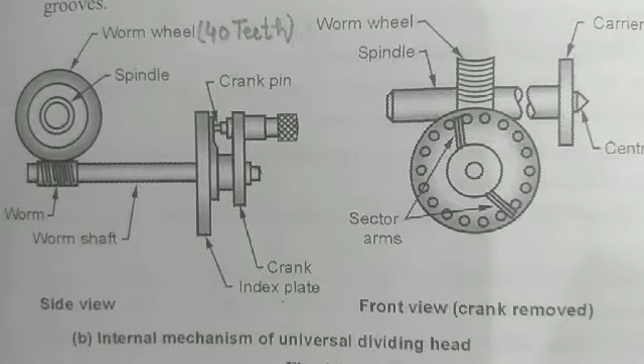Now since we have to make 13 gear teeth on the periphery of the workpiece, which is 50 millimeter in diameter and 150 mm in length, to make 13 gear teeth on its periphery, we have to rotate this workpiece in such a way that 13 equal parts are made.

And for dividing the periphery of the workpiece into 13 equal number of parts, we need a mechanism which is called a universal dividing head.

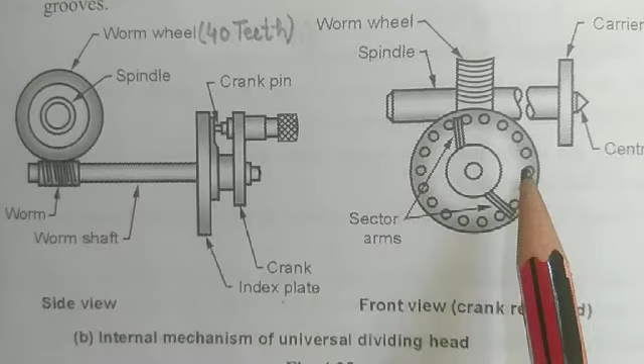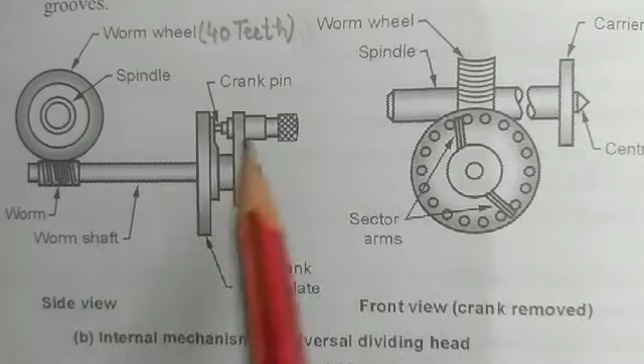Threaded worm. The threaded worm is connected to the worm shaft, and from the worm shaft the index crank is connected. At the top end of the index crank there is a crank pin, and here you can see there is an indexing plate.

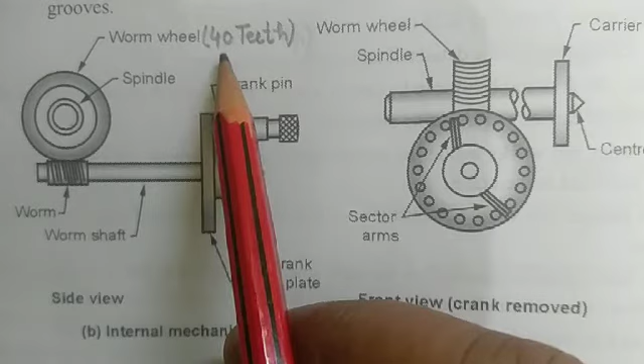Now this worm is connected to a worm wheel, and this worm wheel has 40 teeth on its periphery. This worm wheel is mounted on a spindle.

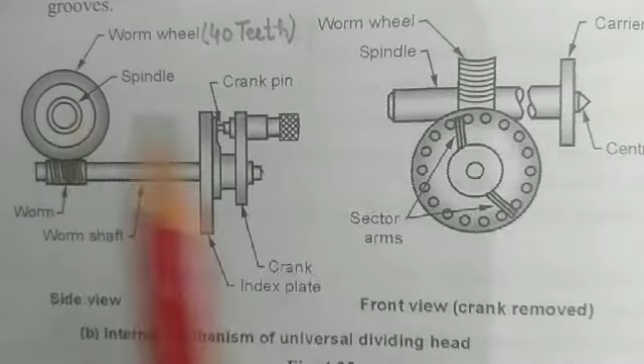Now in the front view we can see here this is the worm wheel having 40 teeth on its periphery, and here is the spindle. This worm wheel is mounted over the spindle, and on the other end of the spindle there is a carrier on which the workpiece, on which the number of teeth are to be cut, is mounted.

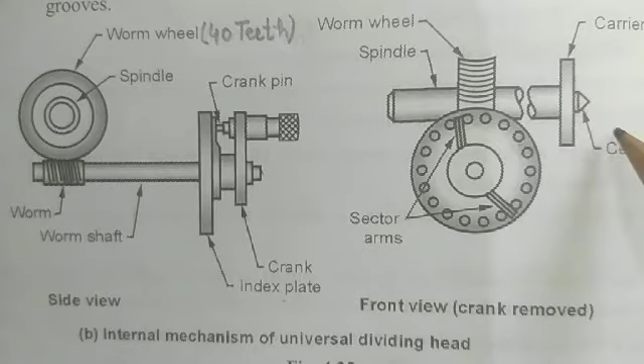Now here is the front view of this indexing plate.

Now let us see how this universal dividing head works.

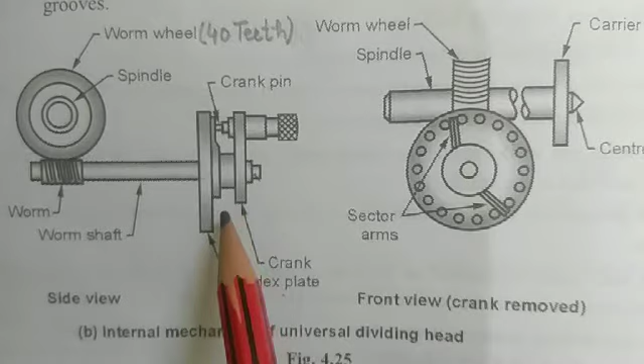When we rotate this crank by pulling out the crank pin from the hole of the indexing plate by one rotation, either clockwise or anti-clockwise, one tooth in the worm wheel moves clockwise or anti-clockwise.

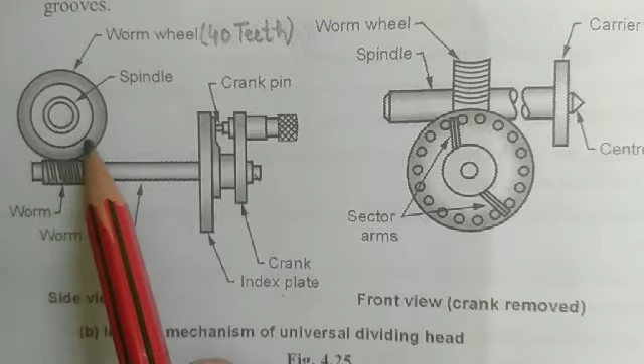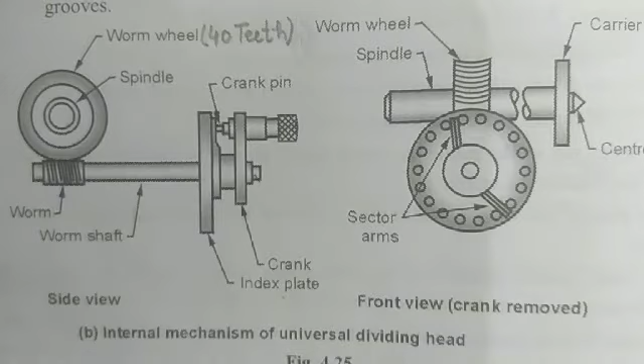So to move this worm wheel for one full revolution, we have to make 40 revolutions of this crank. And once we make 40 revolutions of the crank, the workpiece mounted on the carrier of the spindle on the other side will also make one complete revolution.

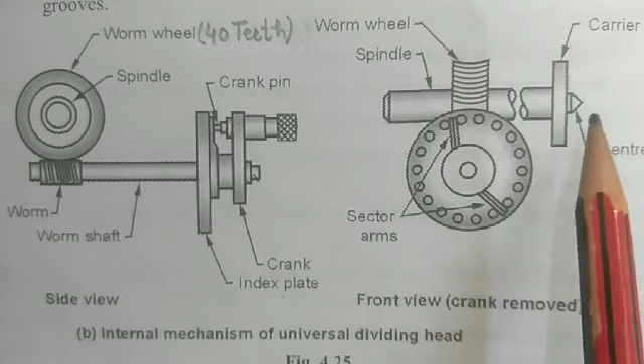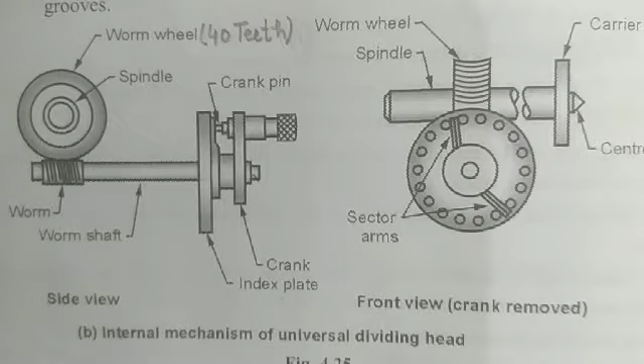Now, in order to make a number of divisions on the workpiece periphery, there is a formula as to how many turns are to be given to the crank, or how many rotations are to be given to the crank to make Z number of divisions.

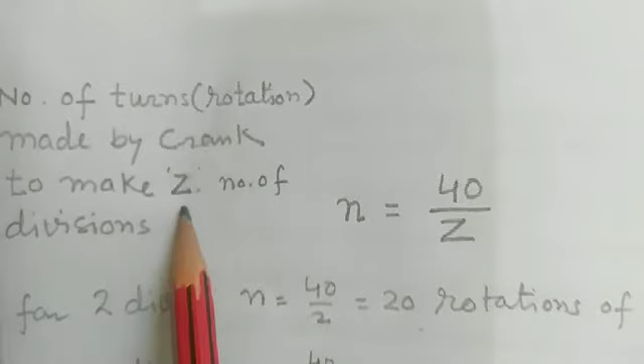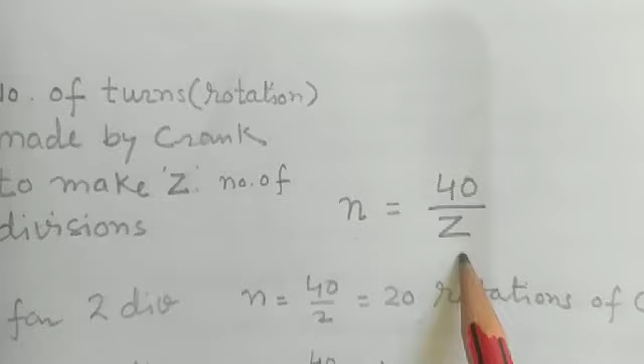So suppose the number of rotations to be given to the crank is small n, then the number of rotations n to be given to make Z number of teeth or Z number of divisions is equal to n equals 40 by Z.

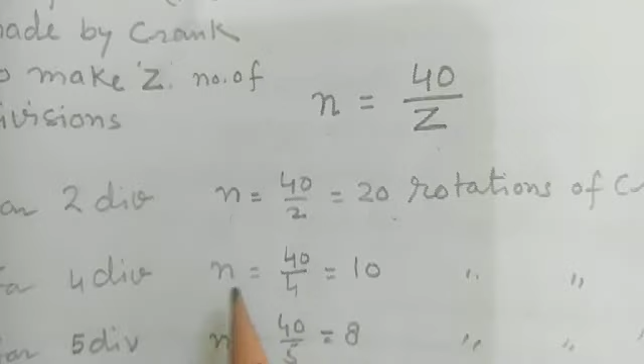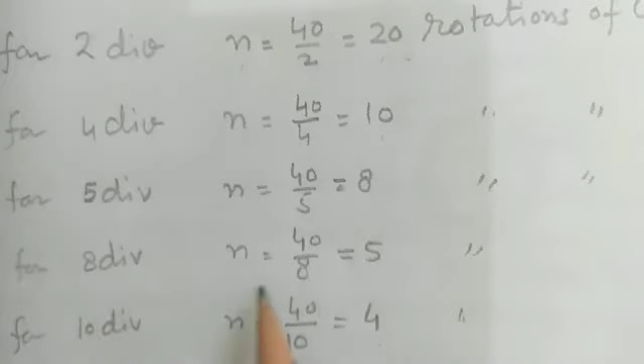Similarly, for 8 divisions, 5 rotations of the crank, and for 10 divisions, 4 rotations of the crank.

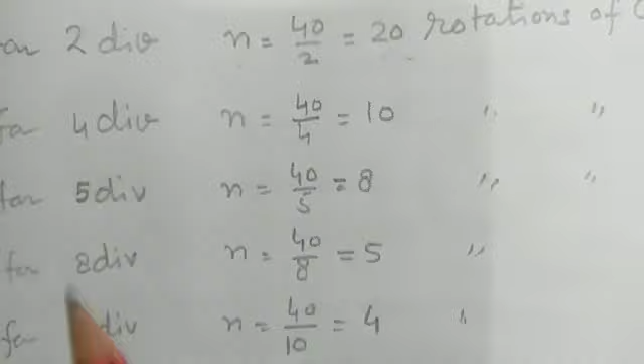But what about other numbers of divisions which don't fit this, because these numbers 2, 4, 5, 8, 10 can easily divide the value 40, and therefore we get whole rotations to be made.

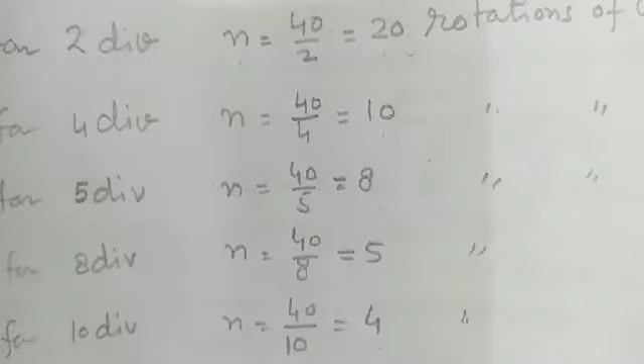Now suppose we have to make 3 divisions of the periphery of the workpiece, or 3 gear teeth. Then the number of rotations to be given to the crank is 40 by 3, that is 13 whole and 1 by 3rd of a rotation.

Now how to give this 1 by 3rd of a rotation? The 13 rotations we can easily give by taking some reference point and rotating the crank 13 times. But how to make this 1 by 3rd of a rotation?

Or suppose in our case we have to make 13 divisions. Now to make 13 divisions, the rotation of the crank to be given will be 40 by 13, that is 3 whole and 1 by 13th. Now how to make this 1 by 13th of a revolution?

Now for this purpose only, to make a fraction of a rotation of the crank, 3 types of index plates are provided.

3 types of index plates are provided on the universal dividing head. Plate number 1 contains the index plate which has 15, 16, 17, 18, 19 and 20 hole circles, that is 6 concentric hole circles.

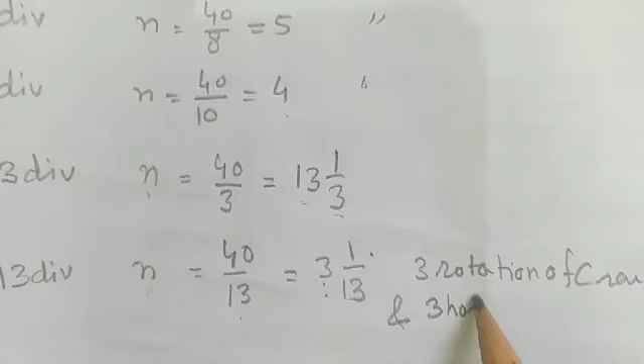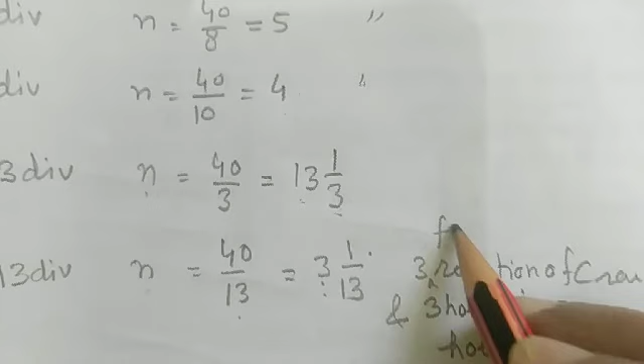and 3 holes in the 39 hole circle. Three full rotations of crank and 3 holes in 39 hole circle. So this total rotation will be given to the crank to make one tooth, and this process is repeated again and again till the time all the 13 holes (teeth) are produced.

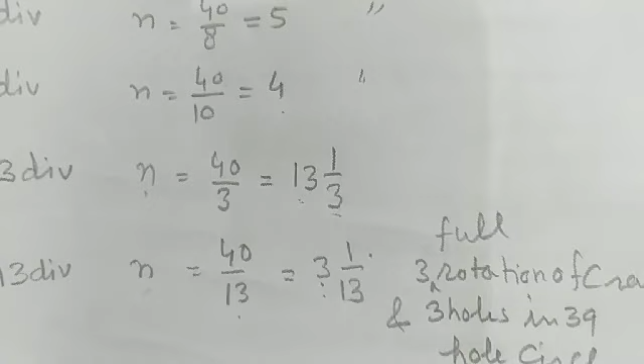Now let us see - so that we should not have to count these 3 holes in the 39 hole circle every time, for that purpose sector arms are provided. These sector arms are adjustable.